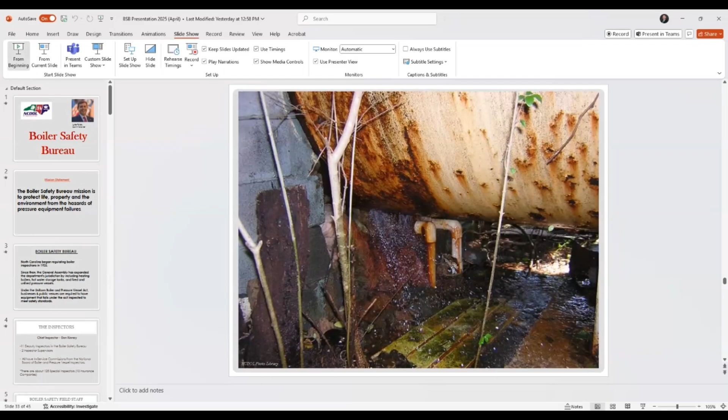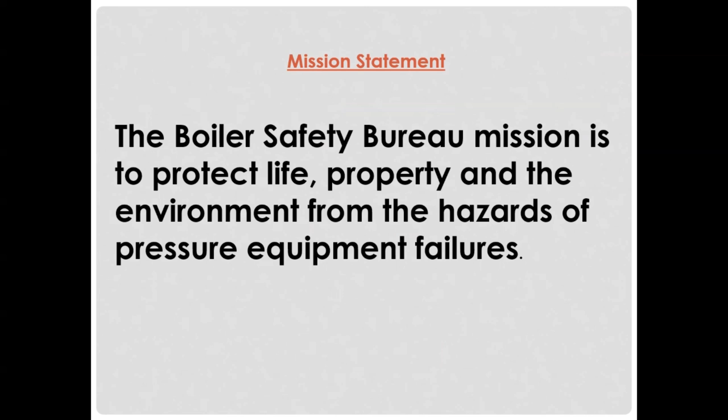All right. Again, we are with the North Carolina Boiler Safety Bureau, which is a division of the North Carolina Department of Labor, and our commissioner, Mr. Luke Farley. Our mission is, of course, boiler and pressure vessel safety to protect life, property, and the environment from the hazards of pressure equipment failures. We began regulating high pressure boilers in 1935, and then later on heating boilers, and in 1975 they added pressure vessels. So we do both boilers and pressure vessels. So anything from an air compressor at a tire shop all the way up to a nuclear power plant, as we were just talking about. So quite a range of things that we look at.

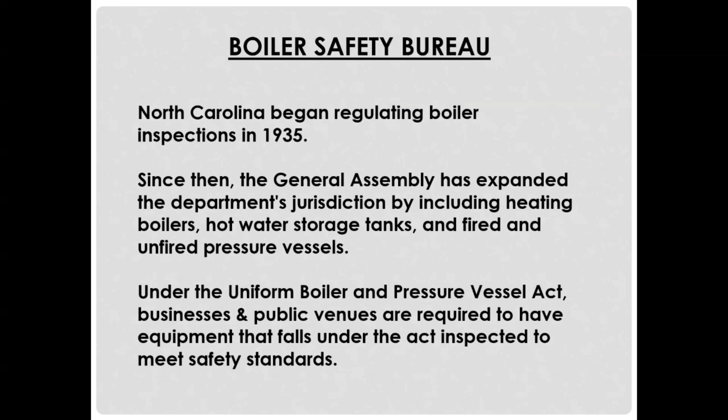We have 11 deputy inspectors out in the field that do these inspections, and 2 inspector supervisors, one for the east and one for the west. We all have commissions for in-service inspection through the National Board of Boiler and Pressure Vessel Inspectors. They're the main governing body for the codes that we work to, and they're based out of Columbus, Ohio. And together with about 125 insurance inspectors, we get all those boilers and pressure vessels inspected every year. So it depends on the type of location and the insurance that they carry on whether or not the insurance company does the inspections. And if they do, they still have to come to us and get a North Carolina inspection commission so that they can do those inspections.

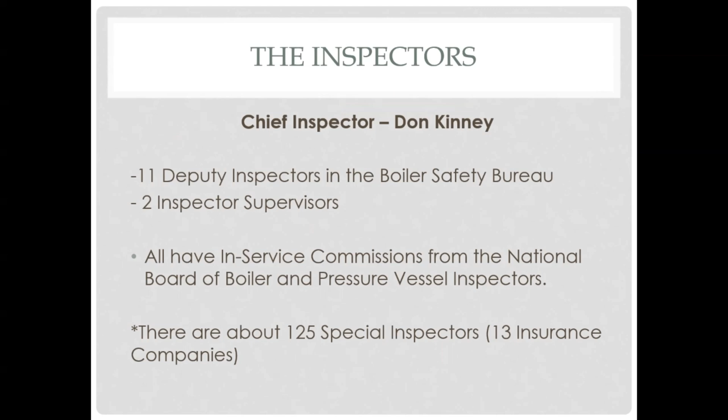If you go to our website, the link is in the slideshow. I think I've shared that with you, right, Stephanie? If anybody needs that, you can probably send them a copy of the slideshow if you'd like.

But if you look up North Carolina Department of Labor, there's a tab at the top called Safety and Health with a drop down, and you can pick boiler and pressure vessel safety. They've done a great job revising our website. All the contacts are right there at the bottom of the page. You can download a PDF copy. You can download copies of our statute and our rules. We have policy notices and all of our forms that you might need.

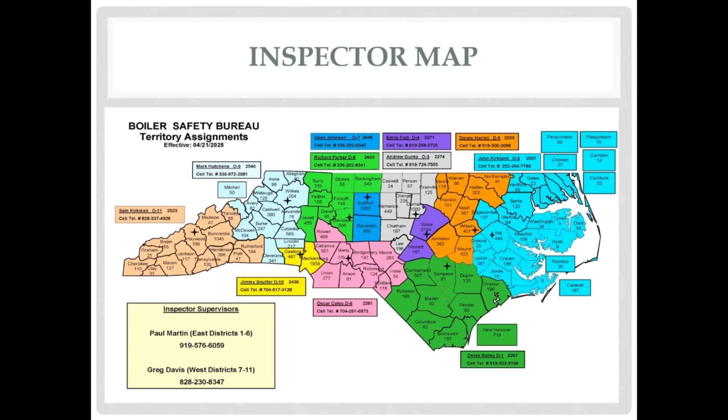This is a copy of our inspectors territory map. You can also get this on our website. But this is what it looks like. It has all the counties that are assigned to each inspector along with their name and their contact information, as well as the supervisors down in the lower left portion.

And a little bit more about us. Like I said, we average a little over 92,000 boilers and pressure vessels in the state that are subject to our regulation. They have different inspection cycles depending on the type of equipment. So we typically do about 52,000 inspections per year. We run about 3,000 violations. That's about average for inspections per year, and about 4,000 pieces of new equipment.

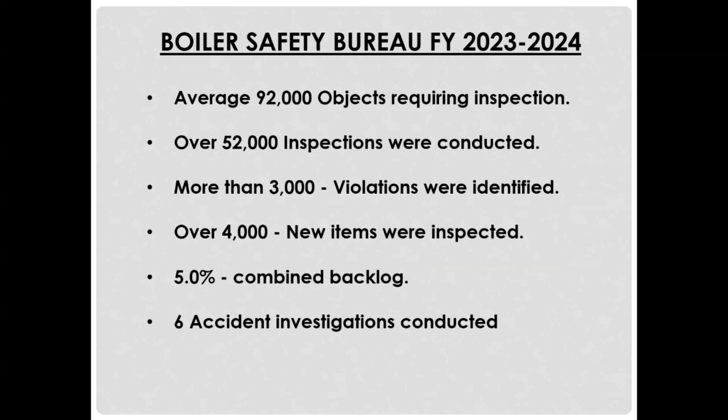Last fiscal year, we ran about a 5% combined backlog, so overdues, which is pretty low for this country. For the country, it typically runs about 10% or more. So we're pretty proud that we run a pretty low overdue inspection backlog. And we had 6 accident investigations that we conducted in that last fiscal year. We average about 8. So thankfully, most of them don't end up with injuries or death, and that's a good thing.

So these are some of the common exemptions that you'll find in our statute, which again is on our website. These are the things that we don't look at. Air compressor tanks that are under 5 cubic feet, 38 gallon, pressure vessels that are 15 PSI or less, water heaters, which you're probably aware of, anything not over 120 gallon or 200,000 BTU. If it's over that, we will be looking at it.

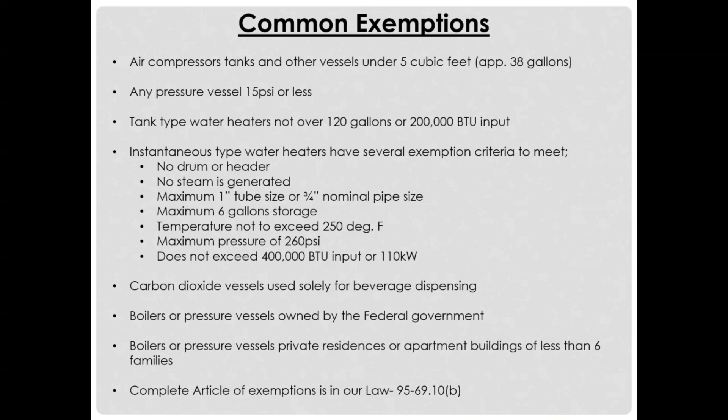Instantaneous type water heaters. There's a laundry list there of the exemptions that it would have to meet in order for it to be exempt. Carbon dioxide vessels, anything owned by the federal government, anything in apartment buildings less than 6 families. There's a long list there on the website, but these are the more common ones. Some of these are a little more technical.

Yeah. So this was one of the big changes from last year. Our clearances to boilers and pressure vessels were really kind of convoluted. So last year we made it much simpler. So basically 36 inches from the top and sides for boilers, 18 inches for water heaters and pressure vessels. But we will take into account manufacturers' installation recommendations.

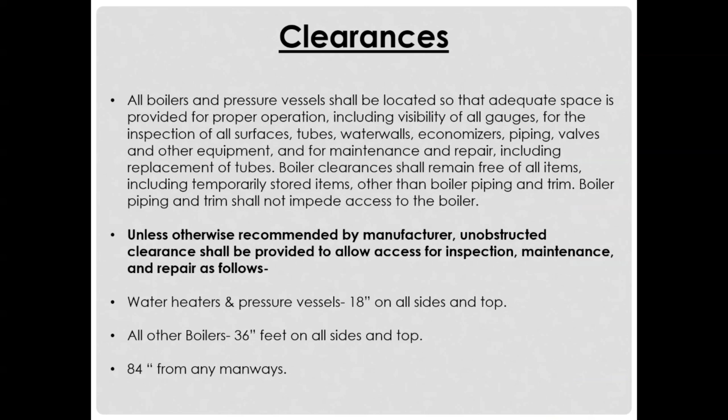So if you are installing a water heater or a pressure vessel, hot water storage tank or a boiler, and the manufacturer says that you can have less clearance than what our requirements are, just make sure you've got that paperwork handy for the inspector when they come to do your first inspection. You'll be able to show that to them, and then they'll accept that. I won't get into the air requirements too much.

One thing that we did add last time around was we got a little more specific on boilers that are outdoors and ones that are installed in a large open space indoors, not necessarily in a boiler room. Those have to be within 50 feet. Emergency stop. And we did make it clear as well that the emergency stop cannot be located on the boiler itself, because of course, the point is if you walk into a room with a boiler and it's on fire and it may explode, we don't want you walking up to the piece of equipment to turn it off. You want to be able to shut that off from a distance.

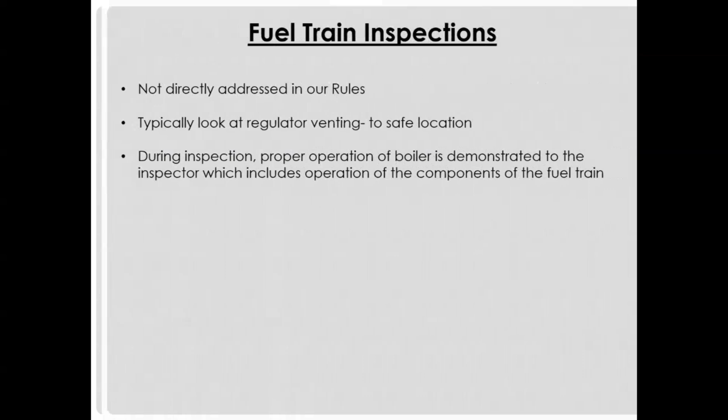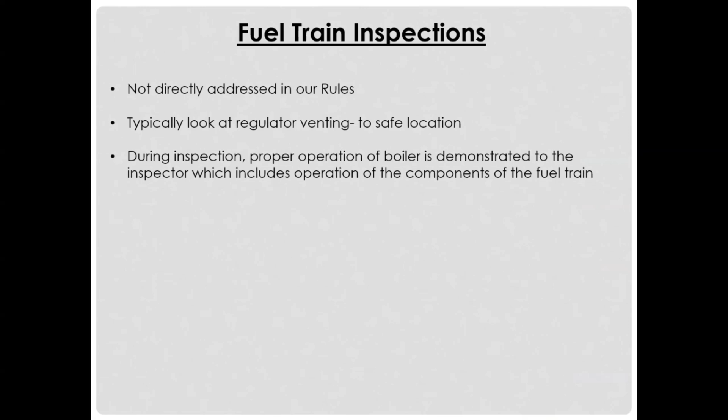Fuel train inspections, they're not specifically addressed in our rules. We do look for regulator venting, but that's about as far as we go on the fuel train inspections. As you're all probably well aware, we don't regulate contractor licenses. That's all done through the North Carolina licensing board of examiners. But we get that question a lot, so that's why it's on this one.

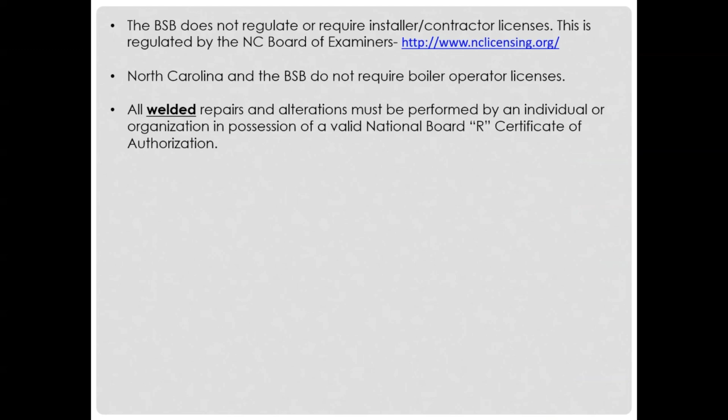Welded repairs to any boilers or pressure vessels have to be done by an R certificate holder, and the repair form must be sent to us within 60 days. So some things that we inspect that you might not be aware of. This is a large cold water hydropneumatic tank to provide drinking water. So you'll see these at some schools, mobile home parks, things like that. You'll often see tanks like this.

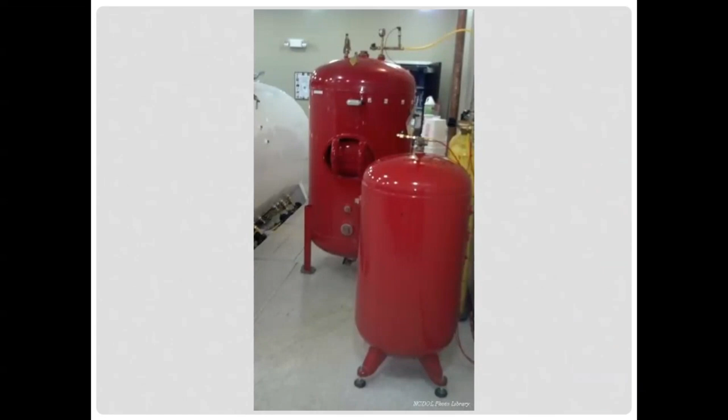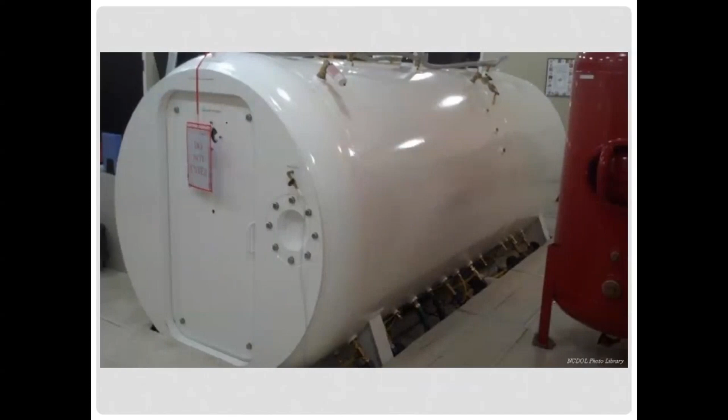These are some air receiver vessels. Of course, the old standard air compressor. And hyperbaric chambers. So we inspect these if they're operating over 15 PSI. We've seen a lot of these in the last several years at the wound care centers. The ones we normally see, though, have an acrylic clear shell, so you can actually see inside. Those are kind of neat.

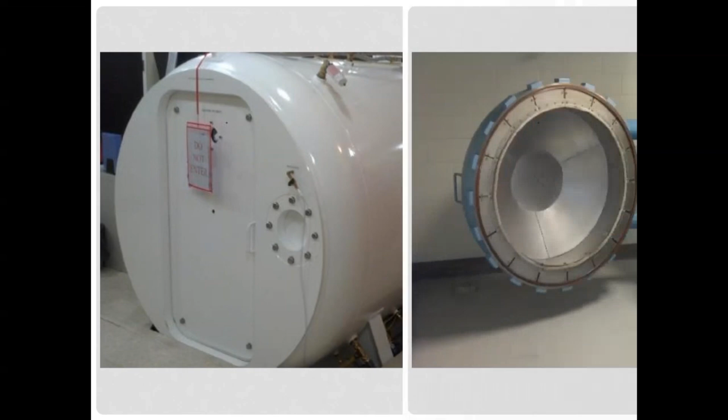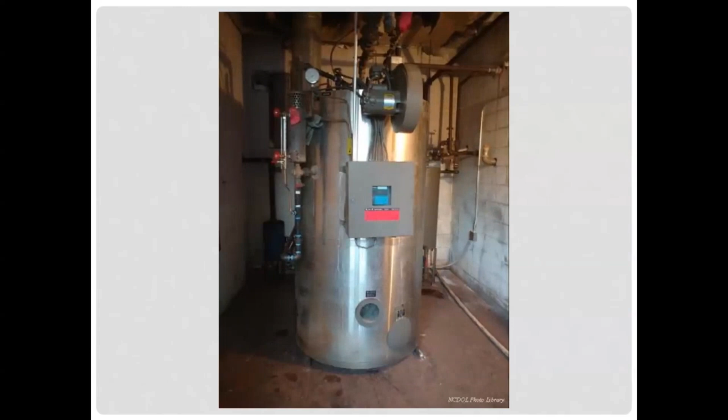Autoclaves. We do a lot of autoclaves where they do lumber treating, rubber vulcanizing, things of that nature. This is your standard vertical boiler that you might see in a dry cleaner. Most dry cleaners have a boiler like this and an air compressor. So we go to almost all dry cleaners and look at their boilers and pressure vessels.

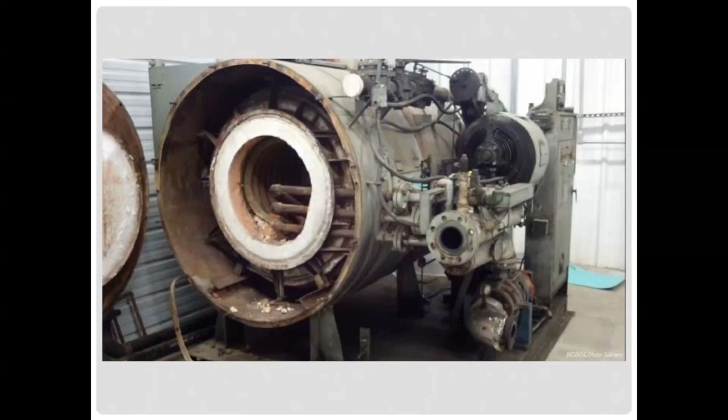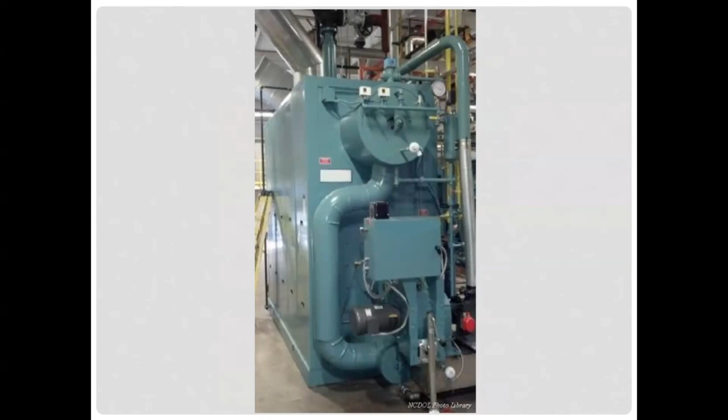This is a hot oil boiler. So there's lots of different hot oil boilers. This one was at a place that builds transformers for power companies. Some of them use food grade hot oil for cooking foods and things of that nature. This is one of your newer types of steam generating boilers.

And even little hobby boilers. If they're of a certain size, you can make your own hobby boiler as long as we approve them. And we do have a few across the state where they'll take these into shows and exhibit these. They're kind of neat little objects.

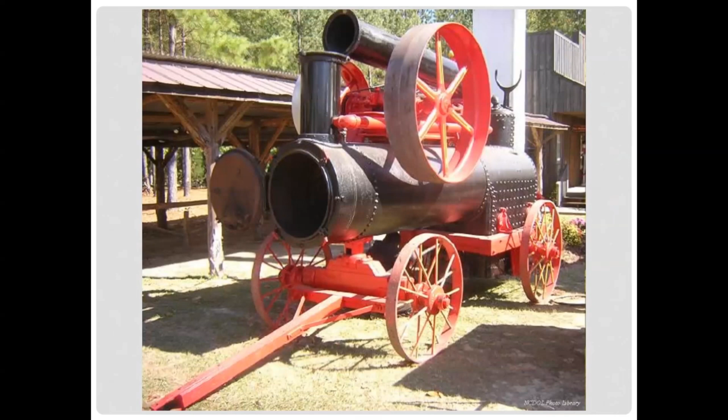Old steam engines. We have several big shows across the state that happen each year. So we inspect, I think, Jeremy, last count, we had like 40 to 50 of these that are active that get showed in the state. And we've got little trains and big trains. We inspect those as well.

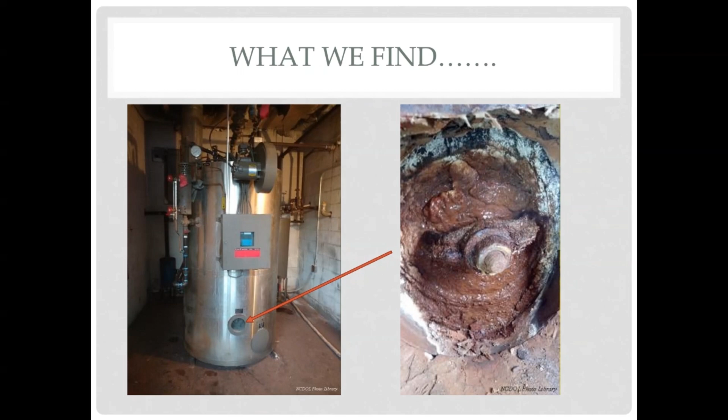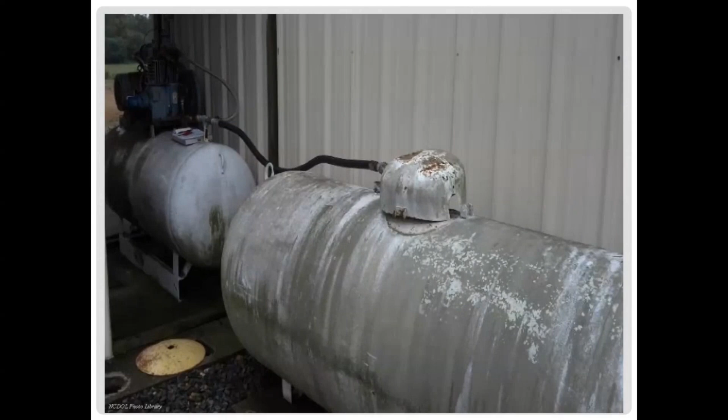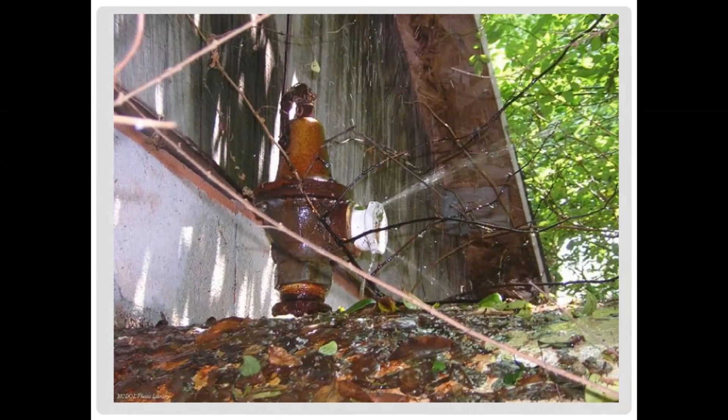I took these pictures and I was walking out into the woods and I heard water and I said, that can't be good. And lo and behold, here's the pressure relief device, which I'm sure most of you are aware is probably the most important safety feature on a boiler or a pressure vessel, and it had been leaking. So someone cross-threaded a plastic plug in it, and it was doing that.

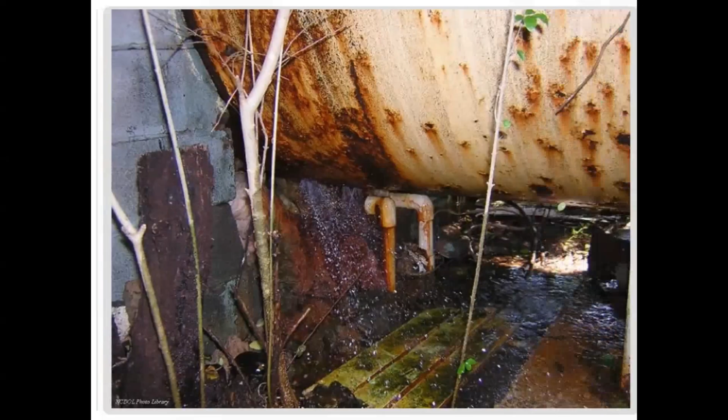And of course, it overpressurized, and that's what happened to the bottom. So it blew the bottom out. And then I got looking at it some more and found some pinholes. And of course, you find the old roofing screws screwed into the holes. They didn't even get that one all the way in.

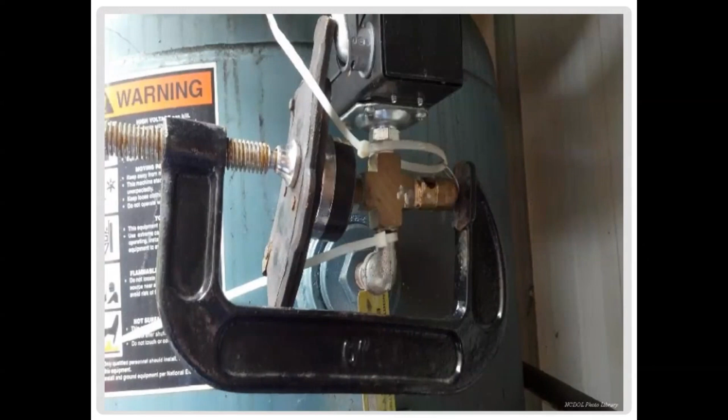So here's an air compressor at a tire shop, and you can see the C clamp is holding a brake pad onto the gauge, and the other side is holding the relief valve closed because they wanted more air pressure. So their thought was, well, we're going to take that regulator and crank it up. But they said, this darn valve keeps popping off, so I'll keep it from doing that.

Well, people don't realize that these pressure vessels and boilers, you know, they're designed to only have a certain maximum allowable working pressure. And that's why they have a relief valve, so they don't exceed that. Some people don't realize that. So this is the kind of stuff that we see out there, and people don't understand that what they're doing is so very dangerous.

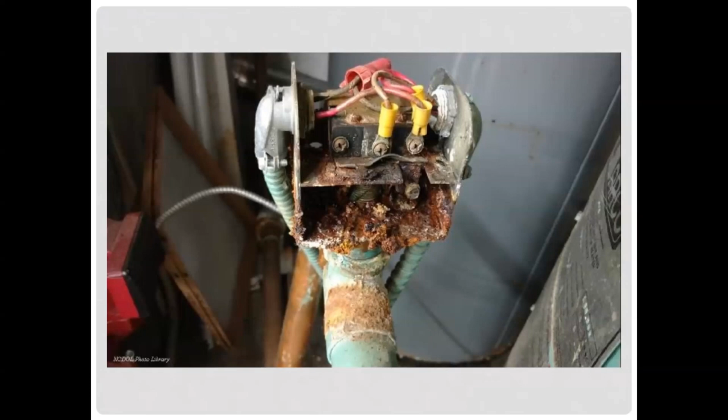Here's a flow switch on a hot water supply boiler. That's why we take covers off of things. You don't know if something's leaking, you open the cover and find out, oh my goodness, that's why that doesn't work.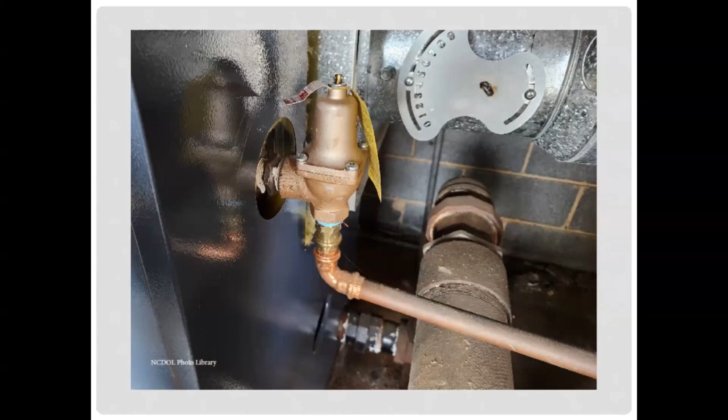Here's a relief valve on the back of a cast iron boiler. And for those of you that install relief valves, you should immediately notice what's wrong with that picture. Of course, the relief valve is installed backwards. So that relief valve will never open if it ever needed to.

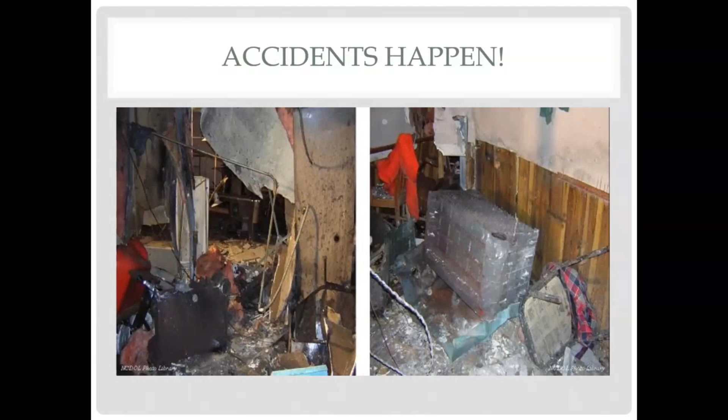And this is what would happen if that cast iron boiler were to explode. This one was at an Elks Club or something like that years ago, and it ran dry and got a slug of water, and it launched itself into the next room. So even these little cast iron heating boilers in the basement of a church could really do some damage.

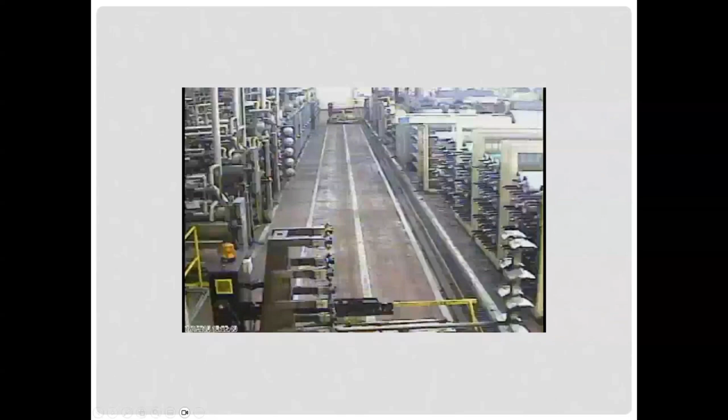So this is a video of what can happen when a gasket gets cut by a piece of equipment. You'll see this gentleman come walking through with a tank top on, and this is a textile mill, and these are little pressure vessels that have really almost boiling hot dyed liquid. And this guy walks down through here, and he was in the wrong place at the wrong time when this gasket failed. It's right there. And he got burned really badly.

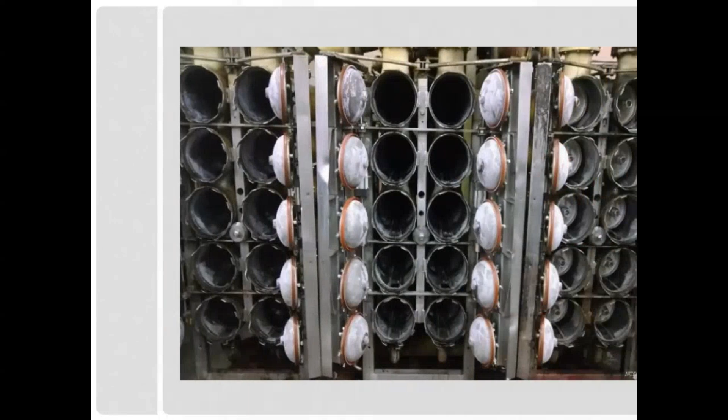And this is what those things look like. And it was one of these orange gaskets that they had nicked with a forklift when they loaded in the fabric. So just part of what we look at. We look at gasketing. When it's visible to us, we check it out, make sure it's in good working order, because this is how people can get hurt.

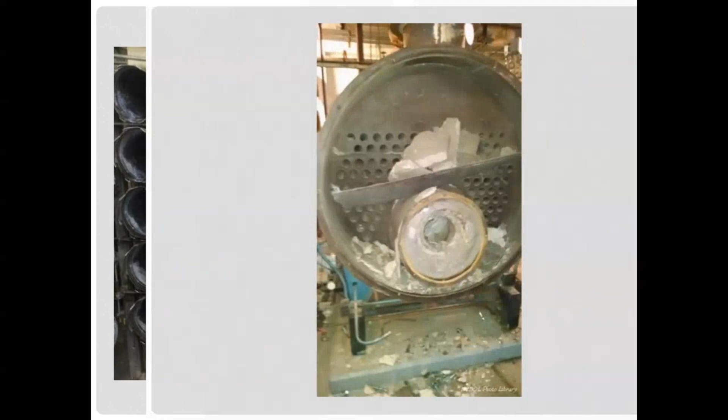Fireside explosions in boilers are common. Most of the time, for whatever reason, the fuel doesn't purge from the furnace, and it ignites with too much fuel in there, and then you have a large explosion inside the boiler, and it tends to do a lot of damage.

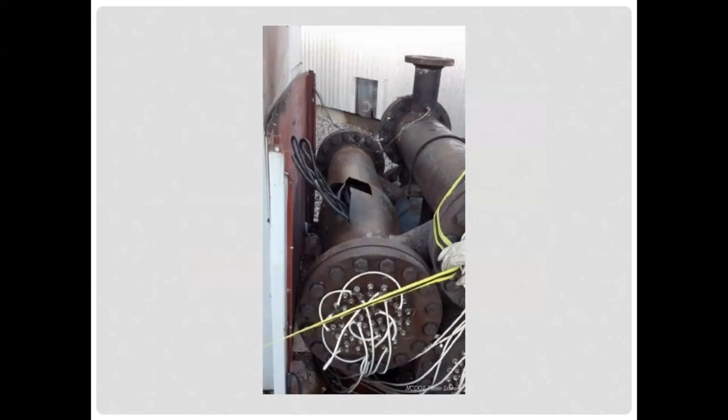This is a superheater at a power plant that ran dry and got just a little bit of saturated steam in it, and it did that. That plate is 1/4-inch thick steel plate, and it opened it right up like a beer can. It's amazing what can happen when water converts to steam rapidly.

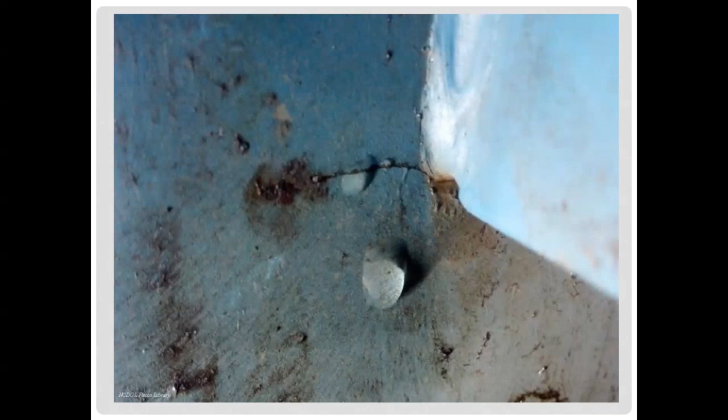Some of the other common things we see, this is the bottom of that old blue air compressor. We all commonly see cracks where the legs are attached to the pressure vessels, because a lot of times they will bolt these things to concrete with no vibration absorption. So the vibration of the motor on top's got to go somewhere. Usually the weak spot is where they welded the legs on.

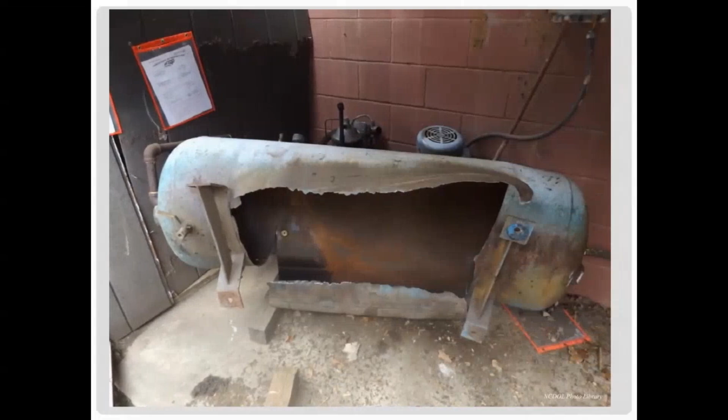And there's one that did let go. This one was just from a few years ago. The reason that usually happens is people don't drain them enough, because these tanks don't have lining on the inside or paint. So all that condensation that sits in the bottom will just start to slowly eat away the bottom of the tank.

And we always say proper maintenance, trained operation, and periodic inspections by an inspector will greatly reduce the likelihood of catastrophic events. And that's pretty much what we do here.

That's my slideshow. So I just wanted to touch on a few of our most important changes that might affect what you all do. The first one is relief valves for the new water heaters, the instantaneous type water heaters, like the wall hung types. Traditionally, our rules said you had to have a temperature and pressure relief valve on all water heaters. Well, we finally caught up with what the manufacturers were doing.

And of course, as most of you probably know, there's no real way to get a probe type T&P valve in some of these manifolds that are coming out of these things. So they're being shipped with pressure only valves. And that's been acceptable to ASME code for a while now, but we finally did catch up, because we had been writing variances and exemptions and so on. So we finally caught up in our rules with that. We already talked about the shutdown switches. That was in the slides, and we talked about the clearances.